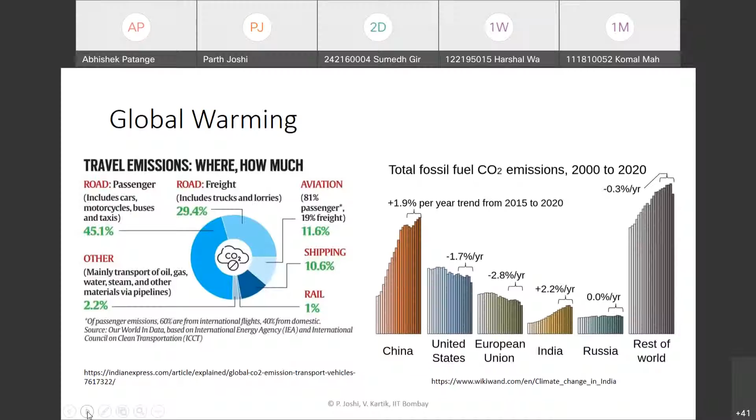Because the transport sector is a significant contributor to this issue, some alternative source of energy has to be looked at so as to curb these emissions.

If we look at the issue of air pollution, the pollution level in India has been witnessing an alarming rate. India was ranked around fifth among the world's most polluted countries, as per statistics reported by IQAir. Among the most polluted cities, six out of the top 10 were in India.

If we look at the rankings by AQI for 2021, India was the ninth most polluted country in the world, and among the top 50 most polluted cities, 43 Indian cities were among the world's top 50. So we can see that the overall air quality in India has been becoming worse and worse every day.

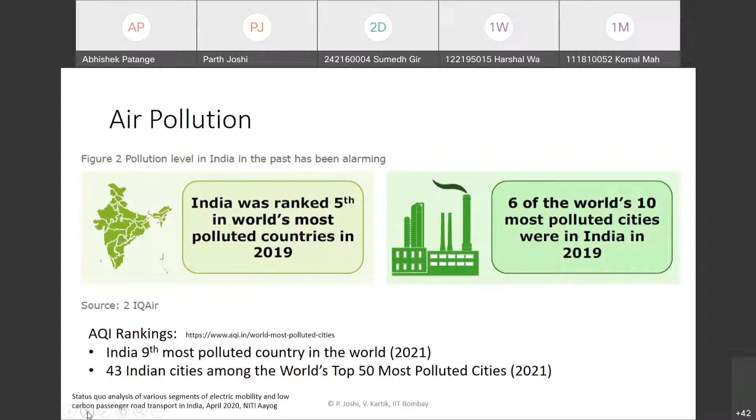This is because there are a huge number of private vehicles in Pune due to the public transport situation, and currently there is a lot of metro related construction going on, causing a lot of traffic congestion in the city. We can see that being reflected in the air quality - the construction work is causing traffic congestion, and that's why transport related emissions are very high in the city.

If we look at the oil and natural gas availability, the domestic availability for India has a very little share of oil reserves and natural gas reserves - about just 0.3% of the global oil reserves, and natural gas reserves as small as 0.7% compared to global reserves. If we see the trend in availability, it has been largely declining over the years.

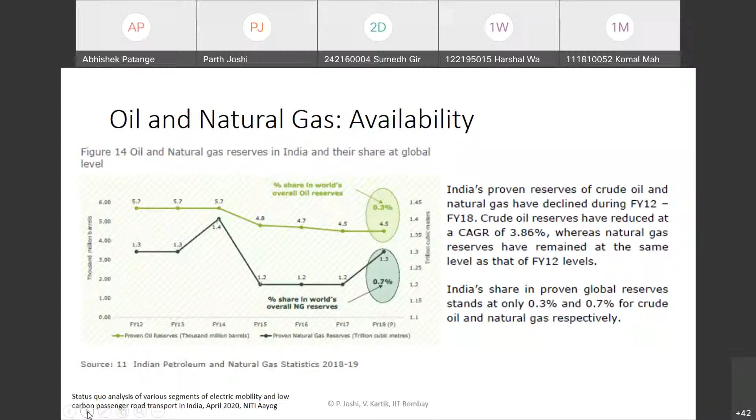So there is a lot of dependency of India on imports. India has to import crude oil and natural gas substantially. If we compare the amount of production and import between financial year 2013 and 19, the production of oil has actually gone down, whereas the import has increased substantially. The import dependency has increased from about 84% to 88%, whereas for natural gas it has increased from 23% to 36%.

Oil and natural gas are both essential for producing fuels like petrol and diesel, so the oil import bill has been always on the rise. For financial year 19, only 12% of the overall crude oil demand was met by domestic production, and for natural gas it was just 64%.

So as we have seen, the issues of basically the increased dependency of the country on conventional fossil fuels. So if we have high conventional vehicles in the way ahead, then the amount of import bill will keep on increasing and also the greenhouse gas emissions would increase.

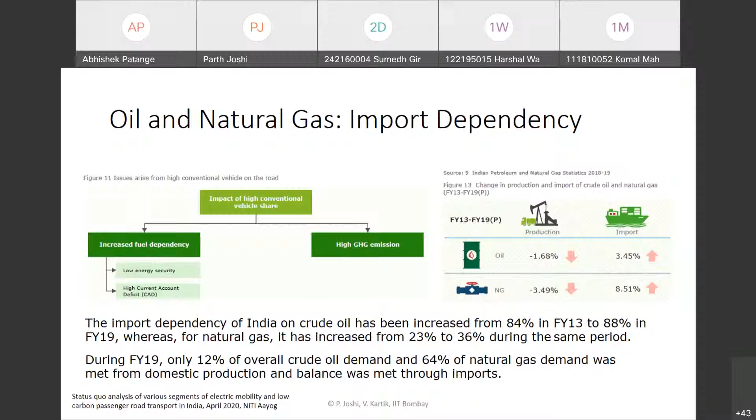So as a part of India's commitment to mitigate this issue, India signed the 2015 Paris Agreement. In the Conference of Parties, India has pledged to reduce its carbon footprint by 33 to 35% by 2030, to levels about which were there around 2005. It has also pledged to increase the share of non-fossil fuel based electricity to about 40% by 2030, and has set a target to reach about 30% EV sales by 2030, largely in the passenger cars segment.

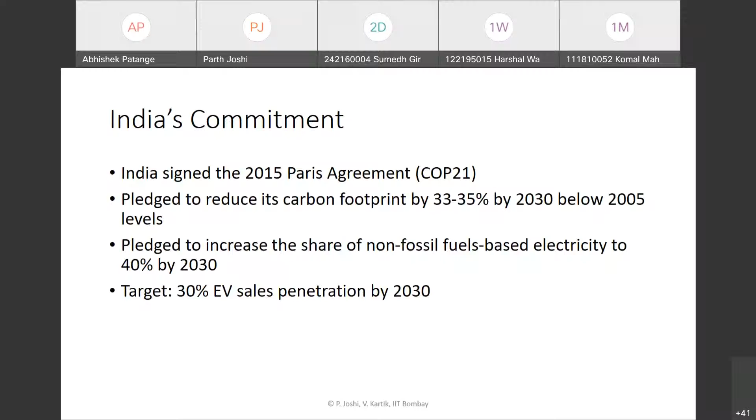So as we see the way ahead, it seems that electric vehicles is a promising pathway because it's clean, it uses electricity, which is a clean energy. So it's a promising pathway to increase energy security and reduce the country's dependence on oil imports, and also to lower carbon dioxide emissions and improve air quality in Indian cities.

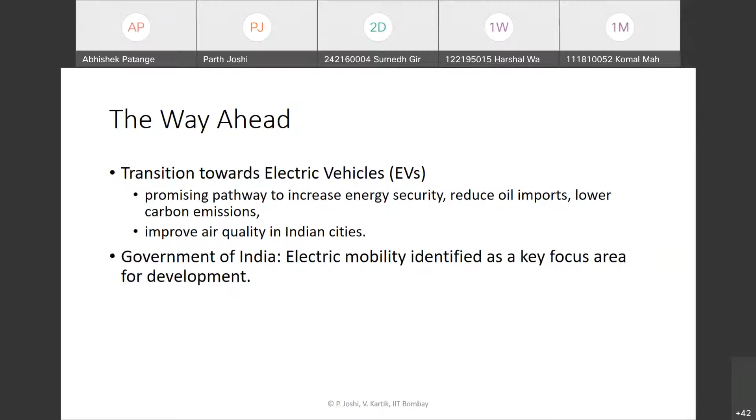Therefore, the government of India has identified electric mobility as a key area of focus for further development, and the government has been pushing for electric mobility in personal vehicles as well as public transport through several initiatives.

If we look at the possible technology options which involve zero or low carbon footprint, we can categorize them as electric mobility or low carbon technology. Low carbon technology would comprise of fuels like CNG, LPG, methanol or ethanol. These alternative fuels are derived from more sustainable sources, or give rise to lesser emissions as compared to petrol or diesel.

We also have other options like battery powered vehicles or fuel cell powered vehicles. Currently, over the last few years, we have seen that the government is mostly looking at battery powered vehicles.

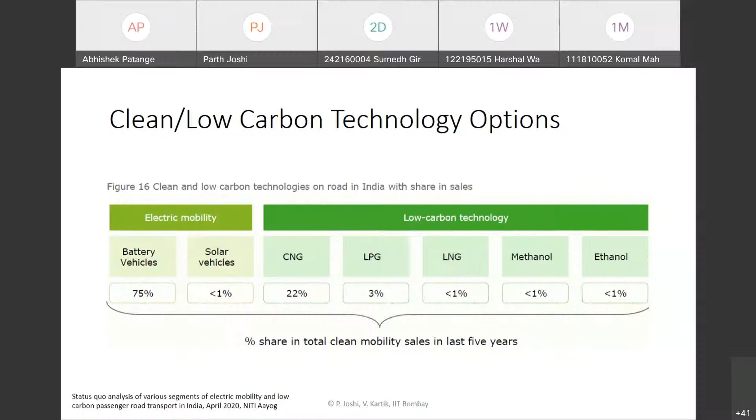As a part of this transformation into electric mobility, Niti Aayog has proposed a new mobility paradigm which involves shared, electric and connected mobility. This involves a larger amount of shared transportation, using more public transport instead of personally owned vehicles, and also more electric vehicles. It also involves connected vehicles, using artificial intelligence and these kinds of technologies to use data and derive meaning out of it, to develop useful solutions and make mobility related systems more efficient.

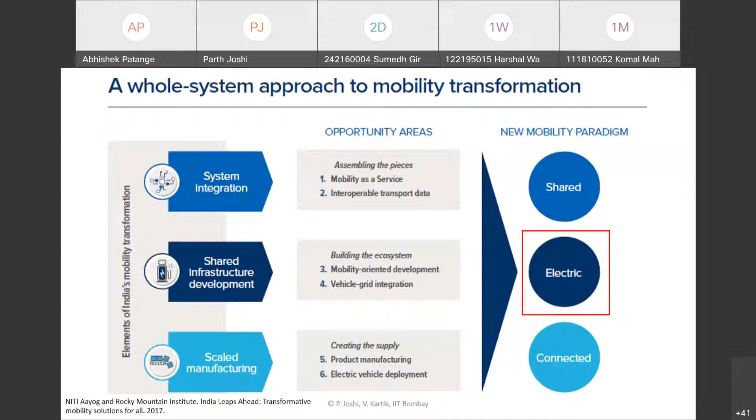The government of India has been taking up several initiatives starting from 2011, when they launched the National Council for Electric Mobility, and around 2014 they launched the National Electric Mobility Mission Plan for 2020, where they defined several initiatives.

Around 2016 or so, phase one of the FAME India scheme was launched. FAME stands for Faster Adoption and Manufacturing of Electric and Hybrid Electric Vehicles. It was a scheme to incentivize the purchase of electric and hybrid electric vehicles. This scheme was not very successful, but it provided some initial momentum.

Then later on, around 2018 or 2019, the government launched the second phase of the FAME scheme, which provided further incentives. It involved a large outlay of around 10,000 crore plus whatever residual amount was allocated to phase one of this scheme, so there is a huge outlay involving several incentives.

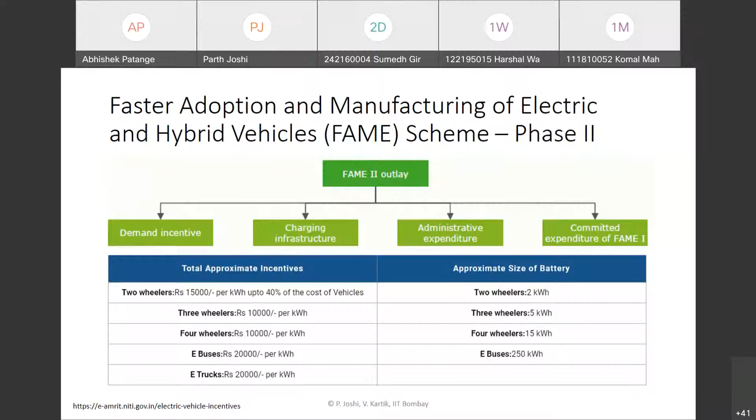Niti Aayog did a study to estimate the potential benefits of this scheme if implemented as planned, for vehicles eligible under FAME, whether private two-wheelers, four-wheelers, or buses. Potential savings of about 5.4 million tons of oil equivalent are estimated, amounting to savings of about 17.2 thousand crores in energy, and the oil import bill is expected to be substantially reduced.

A substantial reduction in overall energy consumption is expected, about 170 petajoules, and about 7.4 million tons of CO2 emissions are expected to be reduced over the vehicle lifetime. These benefits are really promising.

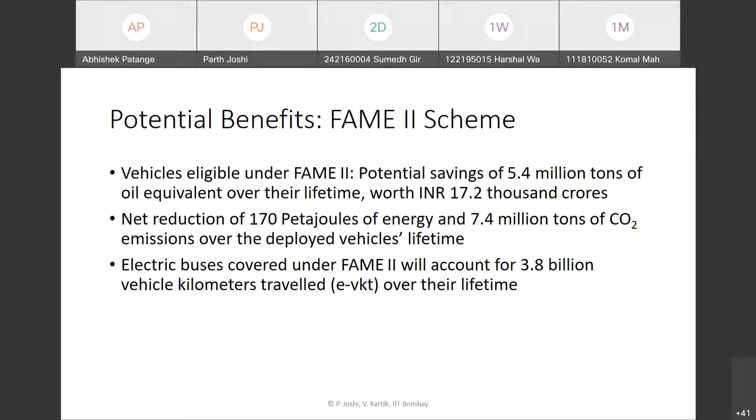A further study was done by Niti Aayog considering the scenario till 2030, projecting the total energy savings and CO2 emission savings. These are very promising: about 846 million tons of CO2 emissions would be reduced, and oil savings of about 474 million tons of oil equivalent. This is a huge number, so we can see that this overall transition to electric mobility is very promising.

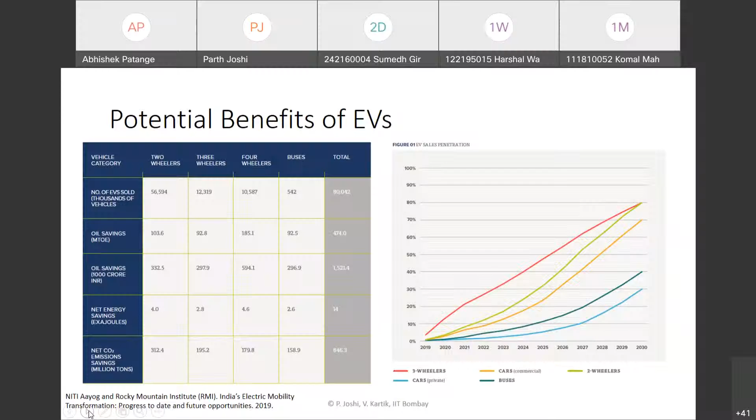So till now we have seen the overall background, and in the current scenario, it is very important to study electric vehicles. So finally, we come to our topic of automotive transmission.

Before that, I just want to know if anyone has any questions or comments. I'll take a pause for a few seconds. Does anyone have any feedback? Am I going too fast or too slow? Any comments? It's just right, okay.

Sure, then we'll move on to our actual topic. So automotive transmission, while designing them, we have some major functional requirements.

If we have to list them, I would like all of you to contribute to this discussion. I hope it should not be a monologue where I am just speaking, since it will become really boring. So if we want to design a transmission for any particular vehicle, what are the factors we would consider? What different attributes would we consider? What are the different factors that are important when designing a transmission?

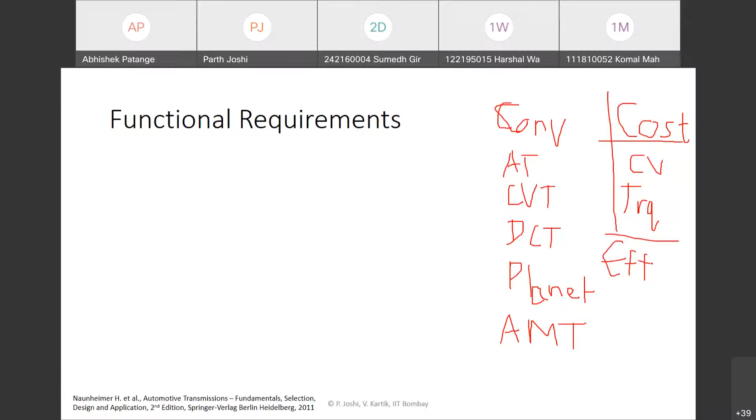So if we have to look at the different functional requirements of transmission, we can probably come up with some of these factors which have been listed out.

Some of you already covered, like high efficiency or cost, and you also covered some applications. So basically, we need a fuel efficient way to transmit power from the source to the load.

This is the major part of the transmission design, the major requirement. We'll also be mainly focusing on this in this particular unit: how do we efficiently transmit power from the source to the load for different operating conditions?

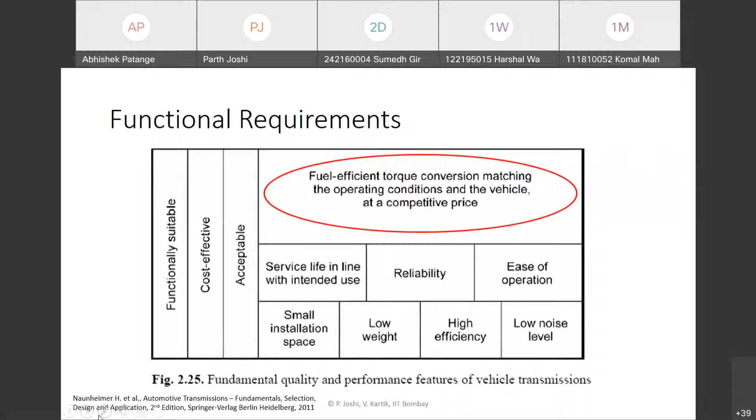There are other factors like reliability or ease of operation. As you mentioned, AMT for ease of operation, if we have to map it to that particular factor, even DCT or AMT or AT, whatever for that matter.

They involve minimal effort from the driver. So they involve a lot of ease of operation, but they may not always be reliable, or they may not be very cost effective.

DCT is basically dual clutch transmission. I'm not sure whether others are aware of this technology. It's an expensive technology, although it provides very smooth shifting between gears.

Automatic transmissions involve torque converters, which are not very highly efficient. They involve a lot of losses and heat generation. So there are factors like this.

The automatic transmission may also become bulky. Even dual clutch transmissions may become bulky. There are different factors like this.

So the key factor is basically fuel efficient torque conversion. If there is a certain torque and speed requirement at the wheels, or power and vehicle speed requirement at the wheels, and there is a certain source, maybe it's an IC engine or electric motor or any prime mover for that matter.

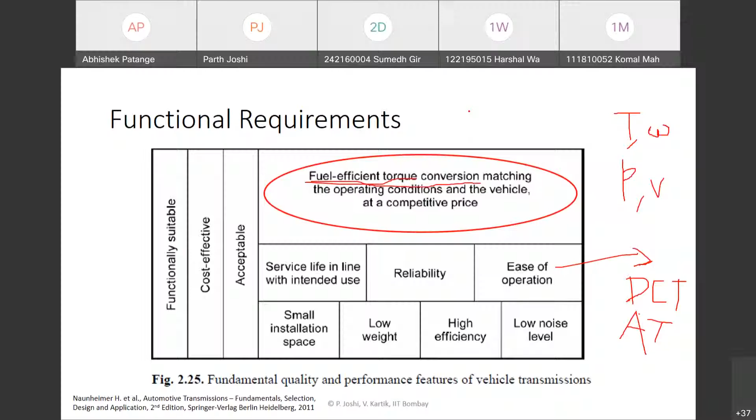What is the torque and speed at which the prime mover, the IC engine or the electric motor, should operate, so that for every power versus vehicle speed requirement, we get the appropriate value of torque and speed such that the source operates efficiently, and we also get the required power and vehicle speed.

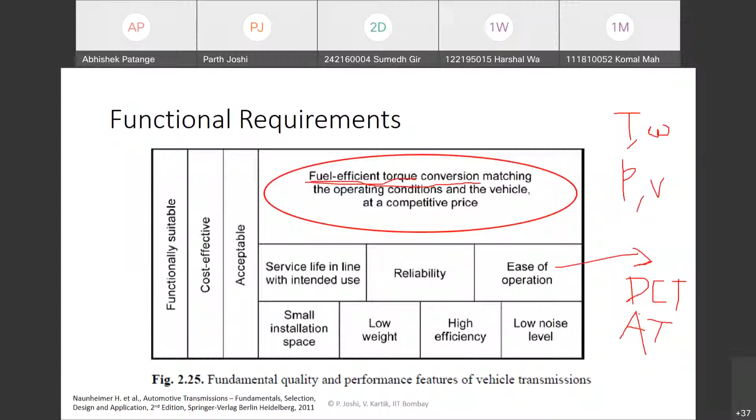If we look at the typical power source characteristics, if we imagine an ideal source of power, we would like to have the entire maximum rated power available throughout the entire speed range. And if you look at the corresponding torque versus speed, constant power would imply torque into speed.

Power is basically torque into speed, torque into omega, which is the angular speed of the wheel. That is constant, so basically that would mean torque is equal to some constant by omega. If we look at the torque profile on a torque versus speed map, we can see that this is a hyperbolic kind of a profile.

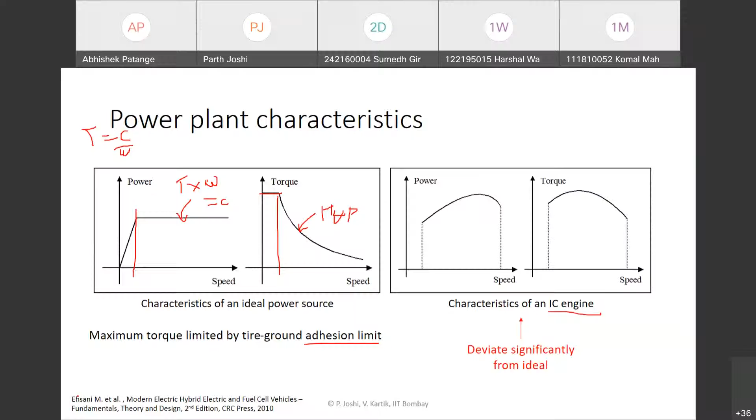If this is understood, conventional vehicles largely utilize IC engines as their power source. So if we have to answer this question - why do vehicles need a transmission at all? We looked at the characteristics of an ideal power source and that of an IC engine. If we have to visualize the function of a transmission, what do you think is the reason? Why do we have a transmission at all in a vehicle?

In conventional IC engine vehicles, the engine does not have maximum torque at the start of the vehicle because it gains torque at a higher speed. So to start the vehicle from zero, we need some torque multiplication to propel the weight of the vehicle. That is why we need a large gear, and a large gear cannot sustain or take us to higher speeds - it has some limitation in speed. So that is why we need shorter gears as well, and that is why we need multiple ratios in an IC engine. In case of a motor, we need to reduce the size of the motor as much as possible, so for the required torque we can take the least size of motor by using a single gear transmission, or we can also use a CVT transmission. So the most important thing is that we need torque multiplication in transmissions.

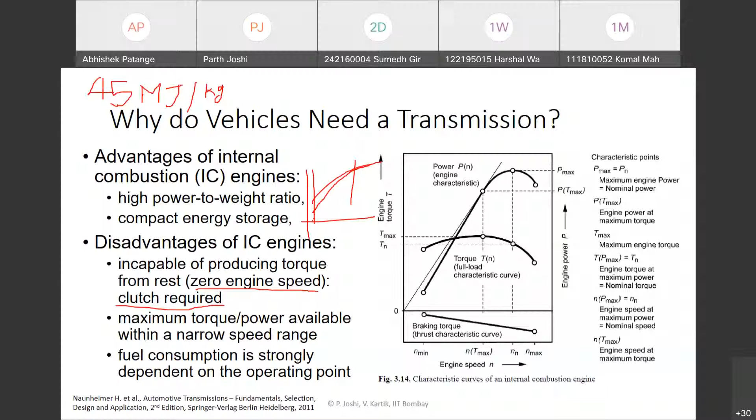So let us say we do not use a transmission, and we just directly connect the IC engine - let's say this block is the IC engine, this is the clutch, and we also have a single gear ratio between the clutch and the wheels. So let's say these are the wheels, which includes the differential and all these things. So basically there is a single gear ratio between the IC engine and the wheels.

If we calculate the torque of the IC engine output multiplied by the gear ratio, that would basically be the torque available at the wheels. And the engine speed, omega e, times r - where r is the wheel radius - divided by the gear ratio g, would be the vehicle speed considering this gear ratio.

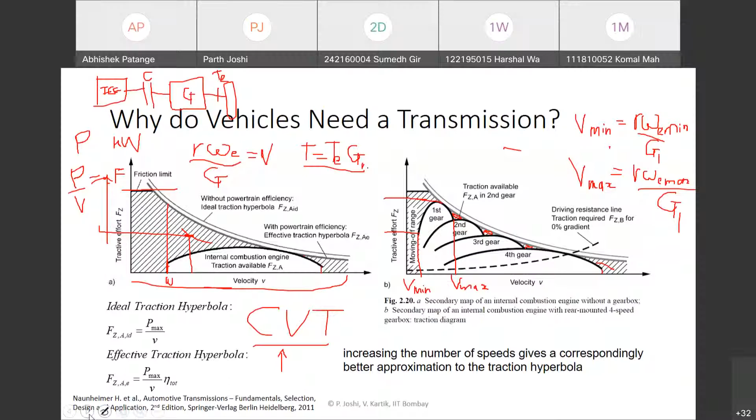So we have seen that by using multiple gear ratios, we are able to cover this torque speed envelope substantially. Apart from that, the transmission provides us a flexibility, or basically a choice, to select the engine operating point. By using this choice, we can place the IC engine point such that we are able to provide the required torque at the required vehicle speed, and also operate the IC engine in its greater efficiency region.

Let's take an example. If we want to drive our vehicle at a speed, let's say 35 kilometers per hour, driving a car. I hope most of you have learned how to drive a car. So let's say we take a speed of 35 kilometers per hour for a passenger car, which gear would we normally be operating the vehicle in?

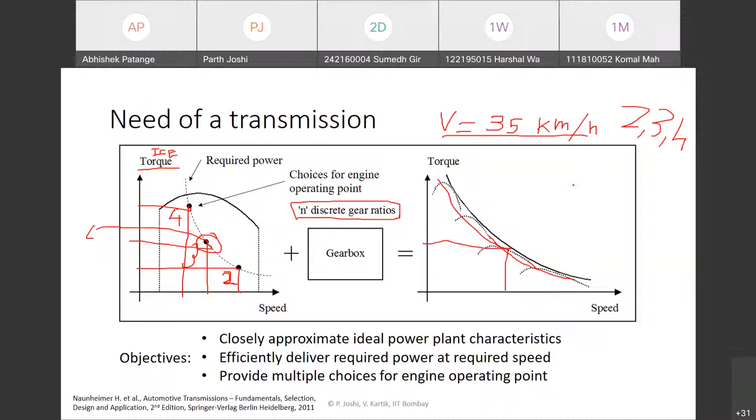So if we look at the typical characteristics of the conventional vehicle, like the IC engine—basically why I am going into the conventional vehicle kind of details is, you probably might have learned all these things already, but in the context of transmissions for electric vehicles, I think it is very important to understand.

So the earlier automotive transmissions which were designed for conventional vehicles, what are the factors based on which they are designed? The characteristics of the power source itself are so important that that is basically the basis on which the transmission of any vehicle is designed.

So the transmission is designed so that we can deliver the required torque at the required speed, and we also want to operate our power source as efficiently as possible. So then, based on the behavior of the power source, let us say IC engines in conventional vehicles, we will design the gear ratios such that in the typical operating range of the vehicle, we will be able to operate the IC engine in its most efficient torque and speed range, and also be able to run the vehicle in its required power versus vehicle speed map.

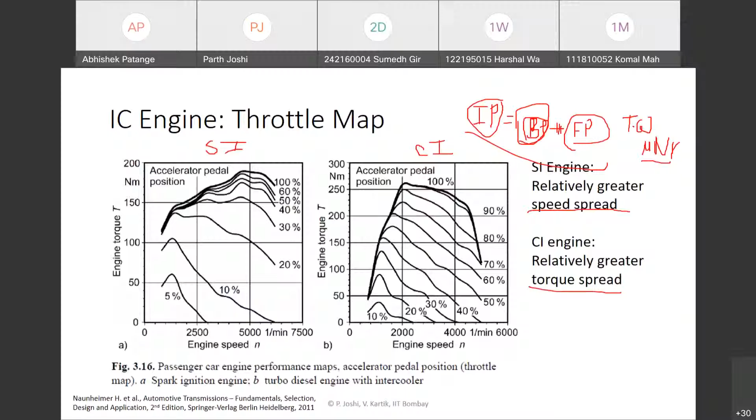There is a certain speed called the base speed, up to which the electric motor can provide high torque. An important advantage the electric motor has is it can produce very high torque even at zero speed. The requirement of a clutch to accommodate the fact that the engine cannot go below idle speed - here we do not need that, because we can directly provide the entire maximum torque at very low speeds. That would help the vehicle's acceleration characteristics, which we will see later. So that's a definite advantage the electric motor has over an IC engine.

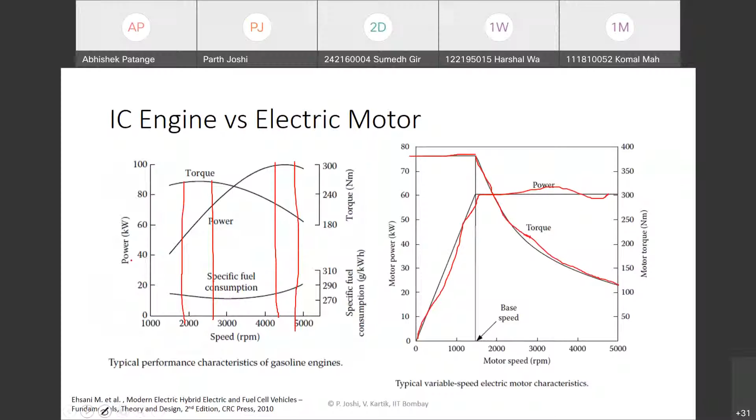So can anyone tell me what is brake specific fuel consumption? It is the equivalent fuel consumption for a unit brake power.

Can you tell me the equation to calculate the brake specific fuel consumption? Or let's say what is the unit, that will probably become easier. Grams per kilowatt hour. Okay, fine. So if we say this is equivalent to grams per second divided by kilowatt hour per second - grams per second is some rate of mass flow, whereas kilowatt hour per second is basically the rate at which energy is being delivered, so basically this is power. So mass flow rate, or fuel consumption rate m dot, divided by the brake power - that is basically the brake specific fuel consumption.

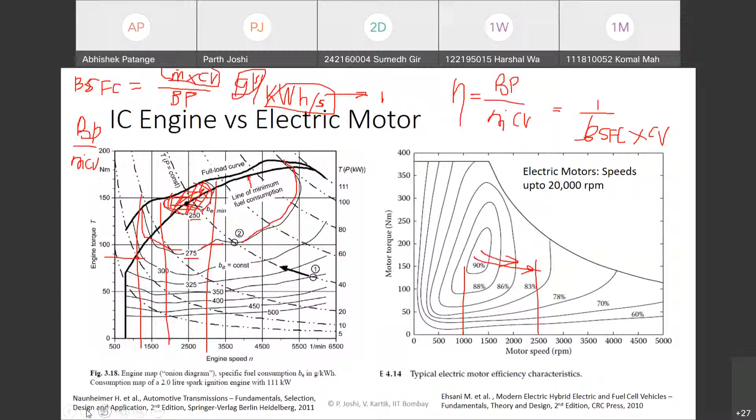With this single gear ratio, we may not always be operating in the best efficiency region of the motor, but the loss in efficiency is not as significant as with an IC engine. So using this single speed transmission, we can also deliver the required power like this. This is just a particular example - it may not always be possible in every vehicle, but the point is that we may not always need multiple gear ratios along with electric motors to provide the required power.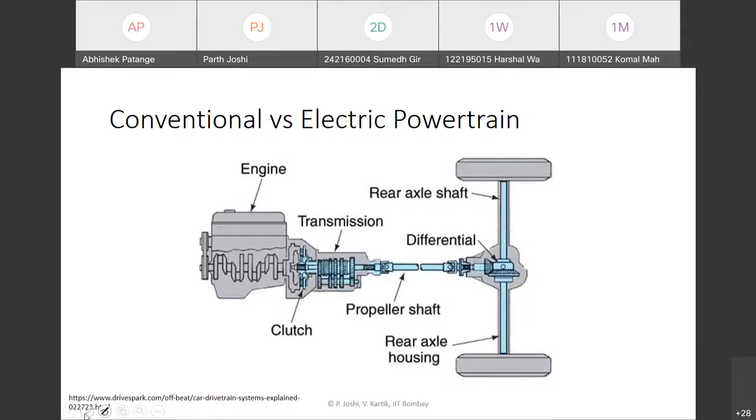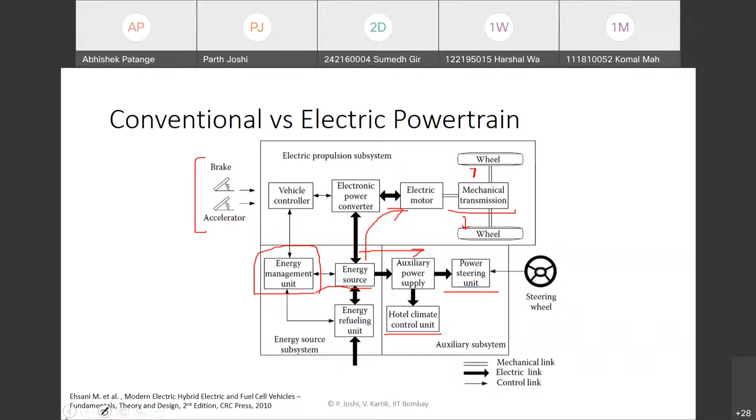This electric motor may be connected to a mechanical transmission, which is connected to the wheels. So this is like a basic electric vehicle layout. So what can we expect like a typical electric vehicle powertrain? Powertrain basically means the way in which different components are connected from the energy source up to the load, or basically the fuel tank to the wheels, or maybe the battery to the wheels in an electric vehicle.

So what can be the different layouts or configurations that we can expect? Let us consider figure A, shown over here. We can have probably a single motor along with a clutch, and maybe a multiple speed, multiple ratio gearbox, which is connected to the differential, called the D, and which is connected to the wheel. So this may be a rear wheel drive or front wheel drive.

Alternatively, we may probably be able to eliminate the clutch by controlling the motor appropriately during gear shifting. So that may be another possible layout, which is shown in figure B.

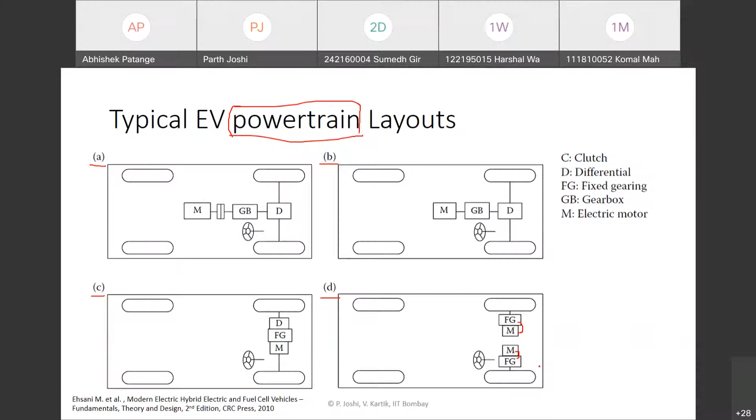We can also think of a similar kind of layout where we eliminate the differential, somewhat like an in-wheel kind of motor. The motor is mounted somewhat adjacent to the wheel itself, and there is a gear ratio, a gear reduction, within the wheel itself. This arrangement is even more compact, and it saves a lot of space and cost as well.

But the control of the motor is very complex, and this has also a definite limitation in the thermal management of this motor. Because the motor gets overheated, the thermal management and cooling of the motor is a very difficult job in these kind of layouts. And we also may need very high torque motors.

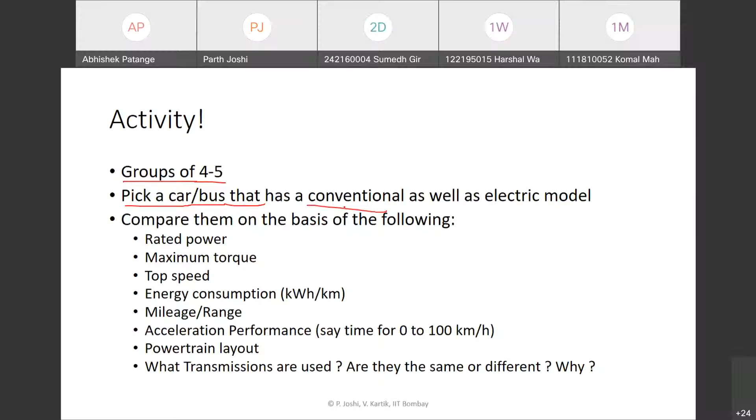We will divide ourselves among groups of let us say 4 or 5 people, and we will pick a car or bus application. We can consider any model which has, so many companies have a conventional model as well as an electric model of the same vehicle, especially the Indian OEMs have. There may be other OEMs overseas as well.

So we can pick up a car or bus which has conventional as well as EV versions, and we'll make a comparison of them based on metrics like rated power, maximum torque, maximum speed, typical energy consumption characteristics, mileage or range figures that are reported, and acceleration performance, which is generally reported as the time required for the vehicle to accelerate from 0 to 100 kilometers per hour or something like that.

What is the layout of the powertrain? How are the different components connected? And most importantly, what are the kinds of transmissions that they use? Between the conventional vehicle and the electric vehicle, are they using the same transmissions or are they different, and why are they maybe different? So please try to collect as much information as possible.

I suggest that you prepare maybe one slide comparing the electric and conventional models based on these parameters. Try to get as much information as possible, even the transmission gear ratios if possible, and then we'll have a discussion in class.